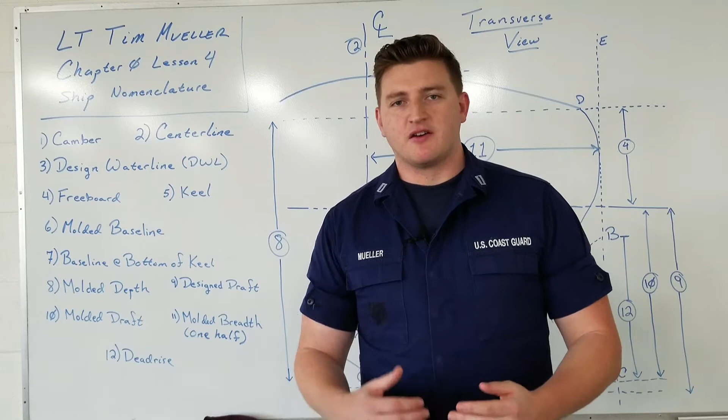When it comes to ship nomenclature, especially when ship stability is concerned, it is crucial that everybody on board, whether it's engineers, operators, or people in combat, completely understand everything that's being talked about when it comes to nomenclature and shifting weights. If the DCA orders weight to be shifted from one place to another, and the person receiving that message doesn't interpret it correctly as the DCA has already calculated, you could have a catastrophic failure in ship stability, and no one knows exactly why.

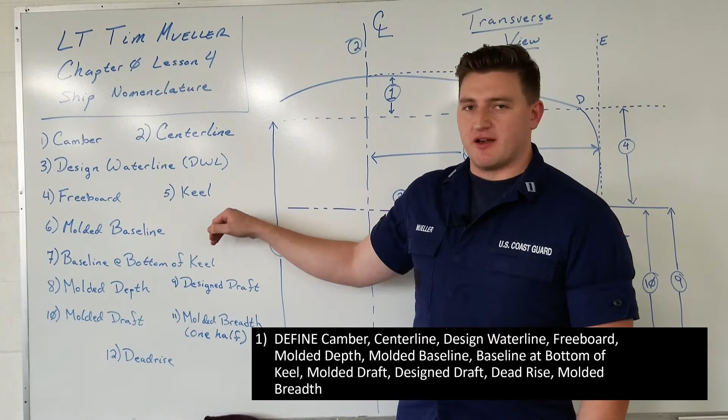So in this lesson, on the left side of the screen, we're going to have all the terms that I'm going to be defining. This will be changing throughout the video as I have a little bit more than 12 terms to go through. On the right side of the screen, we have a diagram on which I'm going to demonstrate these terms. This is the transverse view of the ship.

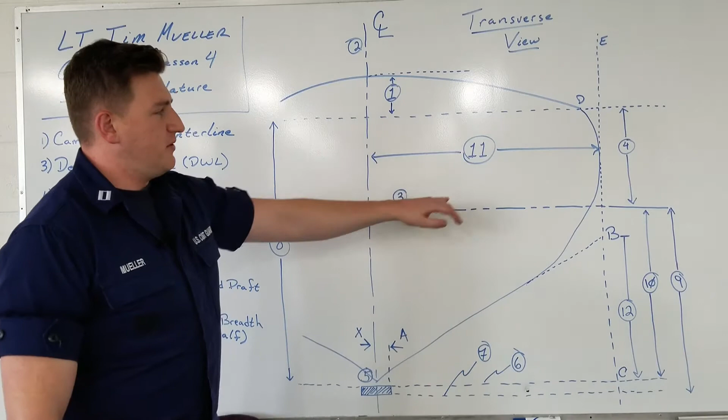So on each side of the center line, we're going to assume that the hull is mirrored. So this is going to be our starboard side. Port side would be perfectly mirrored on the center line. However, we know that there are certain vessels such as flat decks, amphibious ships, aircraft carriers, and the like, who have special operations where they can't necessarily be perfectly mirrored.

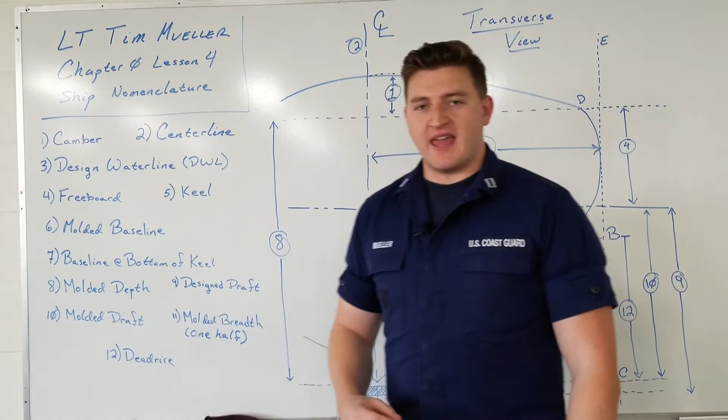So the first term we're going to go over is camber. Camber here is the curvature of the decks. You will always have ships that are higher in the middle on the center line than they are all the way at the very corners. This allows for drainage as well as structural stability that's provided by the decks themselves.

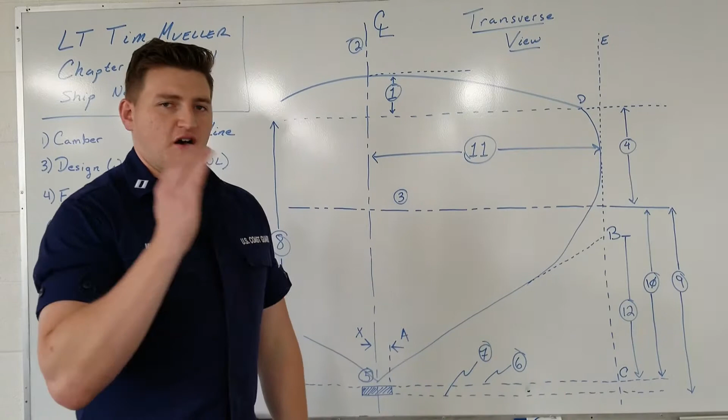Next up is the center line. The center line of the ship runs all the way from stem to stern and just dissects the boat perfectly in half. The symbol that we'll be using from now on is this: it's a C with an L that starts in the middle of that C. And you can see center line runs all the way from the top down to what we'll find as the keel.

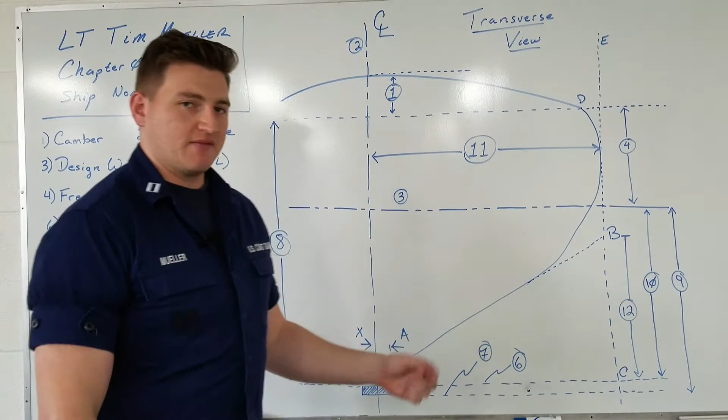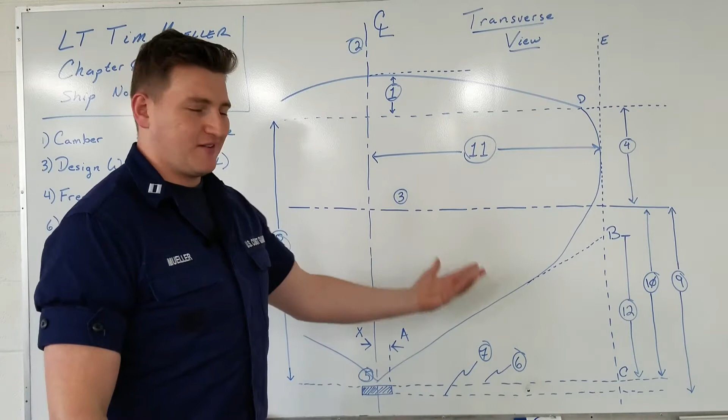Next up, we have design waterline, or as it's also called, designer's waterline. This is the place where the hull is designed to have an initial waterline, as the name suggests. When you develop ships and develop hulls, you have to have one certain condition for the hull in order to do all your calculations around, because every hull has an infinite number of different conditions it can be in, where its center of gravity is, different weights and displacements. So if you just have one that you design off of, you can start making corrections off of what that initial condition is to get as close as possible to your current condition. So number 3 here is the designer's waterline.

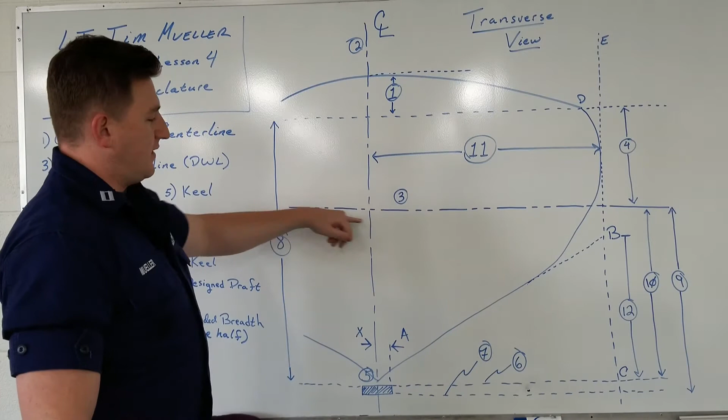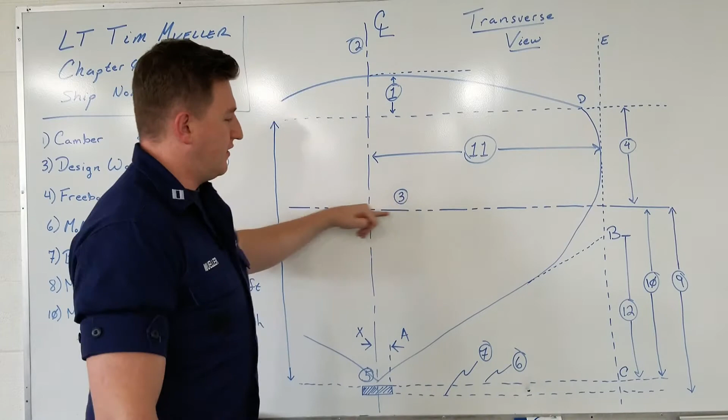However, we know that the waterline isn't going to stay constant there. As the ship gets heavier, the waterline is going to go up. Similarly, as it gets lighter, it's going to go down. So any plane here that's parallel to the design waterline is just called a waterline.

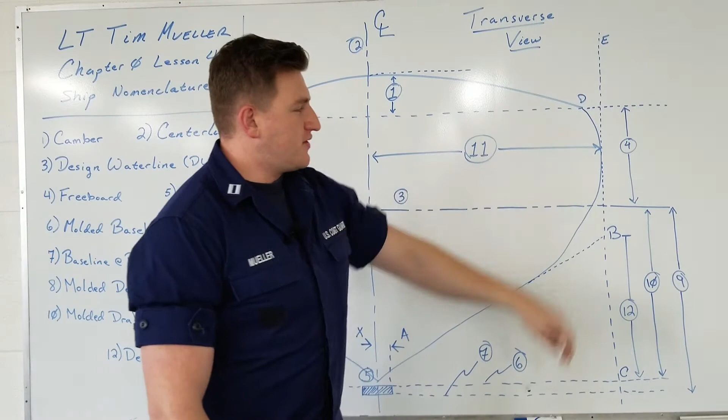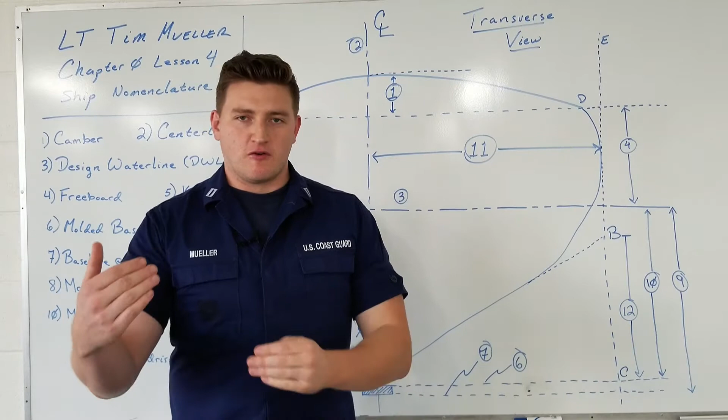Next on the list is freeboard. Freeboard is something that goes hand in hand with what's called reserve buoyancy. Freeboard is located right here, so it goes between the design waterline and then the deck edge. This point D is the edge of the deck, or the deck edge. Freeboard is the amount of hull that's able to sink or actually go into the water because it can roll, and this point can come closer to the waterline. So that's how far the deck can roll or be immersed without water actually coming up onto the deck edge.

All right, now number 5 on the list is something that everyone that served on a ship should be pretty familiar with right now, and that's the keel. The keel is arguably the most critical structural component of a ship. Everything from the girders to struts to the skin of the ship is either directly or indirectly connected to the keel.

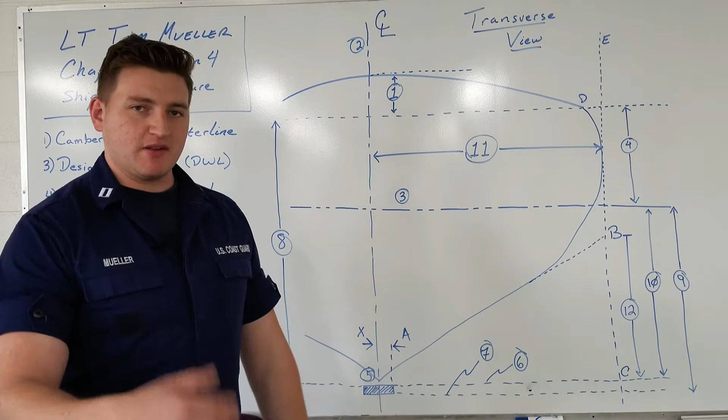The keel forms the basis of the draft, which will be the deepest part of the ship, as well as the overall curvature from stem to stern.

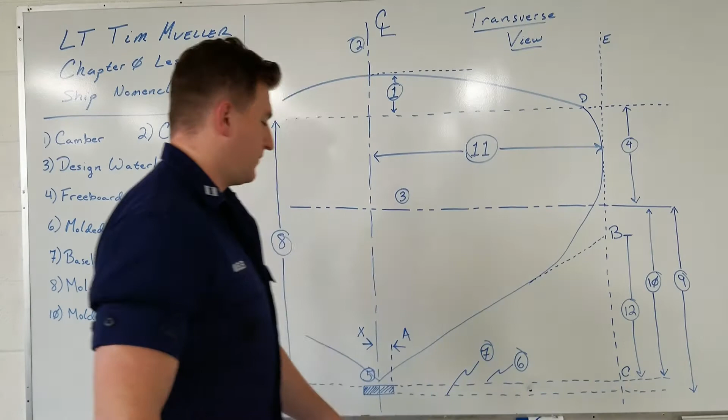The next two terms we're going to go over are the molded baseline and the baseline at the bottom of the keel. The molded baseline is number 6, and number 7 is the baseline at the bottom of the keel. Now the keel on some ships, relatively small ones, might be very small, maybe only a foot, maybe 2 feet. So the distance between the molded baseline and the baseline at the bottom of the keel might not be very significant.

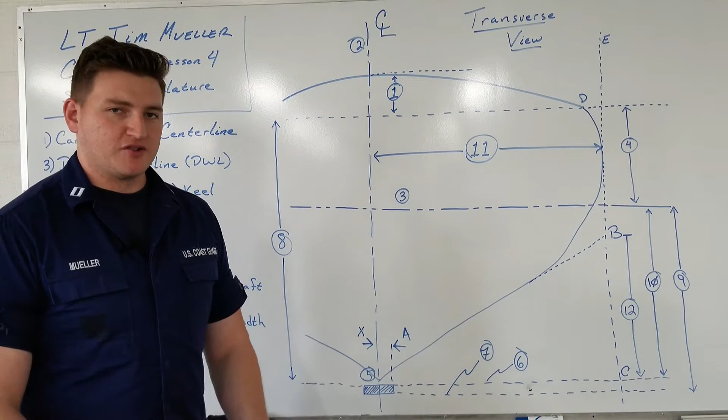However, when you get into larger naval ships, such as the LHDs or aircraft carriers, this keel can be enormous. And so the distance between the molded baseline and the baseline at the bottom of the keel can be significant. So moving on from that, we have molded depth.

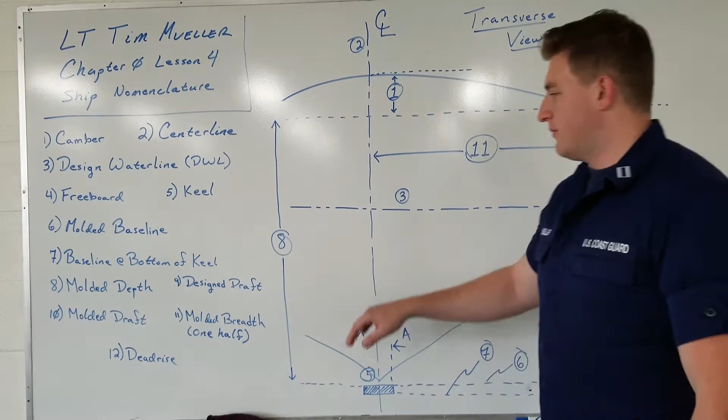Molded depth is number 8, right here. This dotted line goes from point D, which is where the deck edge comes, and the molded depth goes all the way to the molded baseline. Now here's a different reference point, so we're not using the baseline at the bottom of the keel, we're using the molded baseline, and we're going all the way up to where the deck edge is.

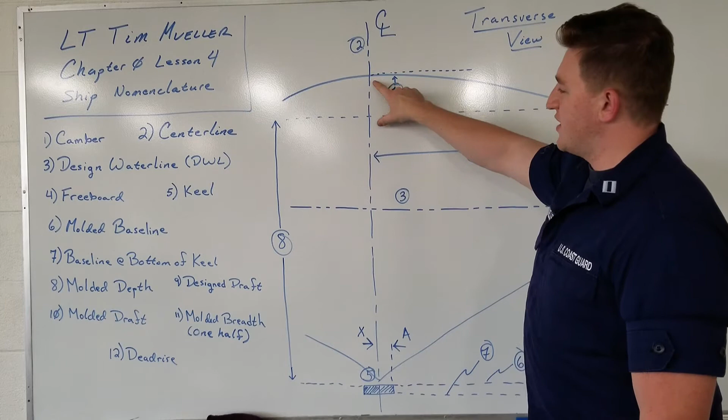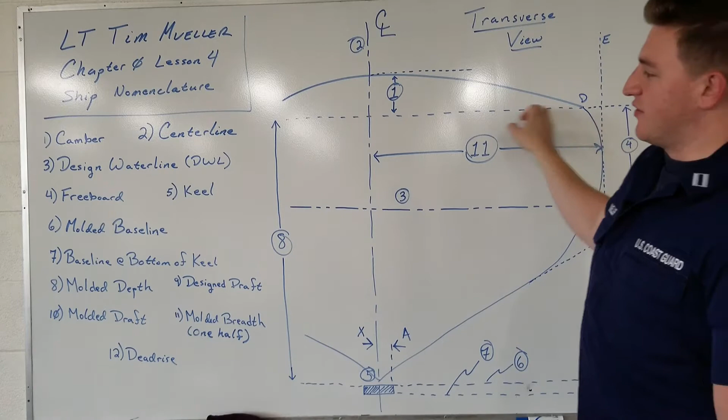So you can take this as the height of the ship at the center line minus the camber, which is number 1, and that's going to be that top point. Or by definition, camber is 0 at the deck edge. So you just take that deck edge point all the way to the molded baseline, which is on top of the keel, and that's going to be your molded depth.

Next up, we have design draft. If you've ever stood next to a Navy ship or a Coast Guard vessel or a cargo ship on a pier, you probably noticed right at the waterline there are several different numbers. Those numbers tell you exactly how much ship there is underneath the waterline.

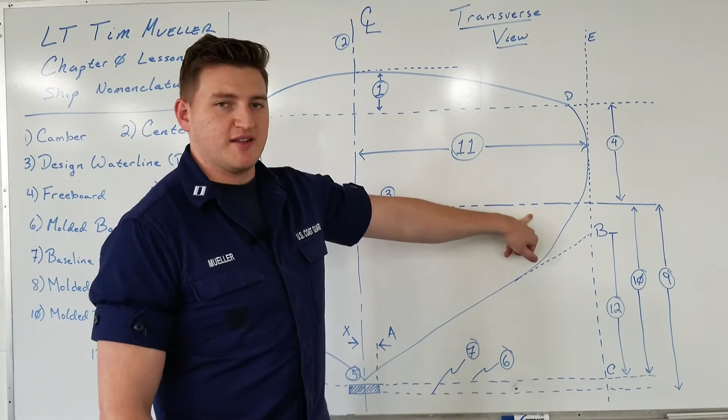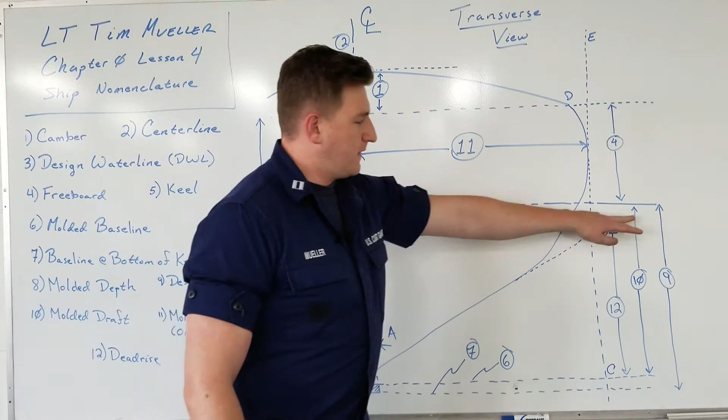When we talk about design draft, as we are right here, we're talking about the distance from the design waterline, or the designer's waterline, all the way to the baseline at the bottom of the keel. So that's going to be our number 9, design draft. It goes from the design waterline all the way to the bottom of the keel, and this tells us exactly how much ship we have underneath the water.

That allows us to make calculations and do chart corrections and navigation, voyage planning, things like that, so that we don't hit anything when we're sailing and steaming along.

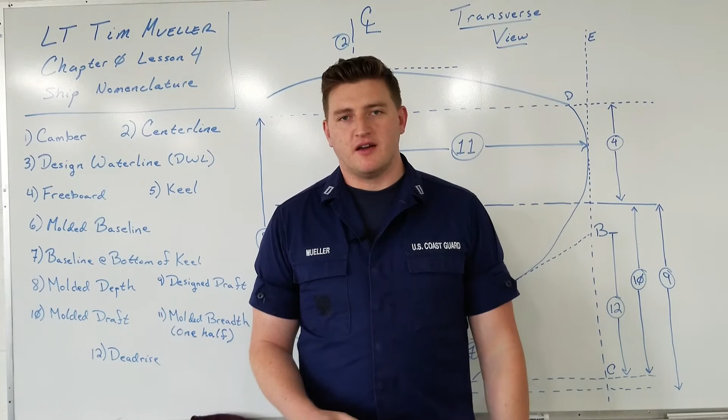Now, there are several different types of draft. You have standard draft, design draft, navigational draft, as well as different drafts located on a Plimsoll mark, which is something we'll introduce in a later series. However, we're going to go over molded draft right now.

Molded draft is number 10, and it's going to start at the same place as design draft, so it starts at the design waterline. However, it's not going to include the height of the keel. So 10, our molded draft, goes from the design waterline all the way down to the molded baseline. Next up, we have molded breadth.

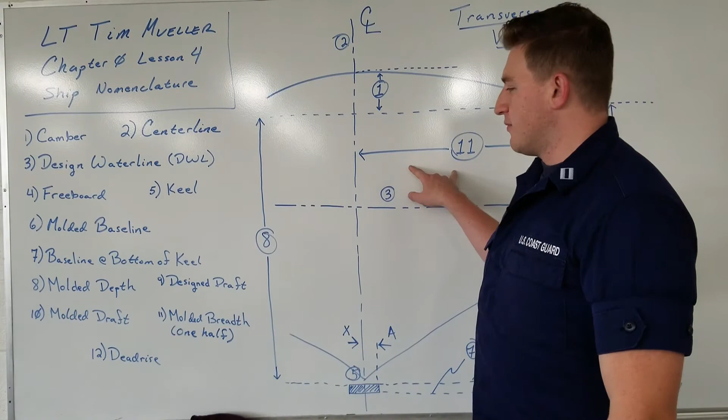A lot of people will call this the beam of the ship, but it's essentially just the extreme width of the ship. This is important when you're going through a canal or any place where you might have a restricted passage. So 11 here is half of the molded breadth. We start at the center line, and if we assume everything is mirrored on the port side, then our entire molded breadth is going to be this distance times 2.

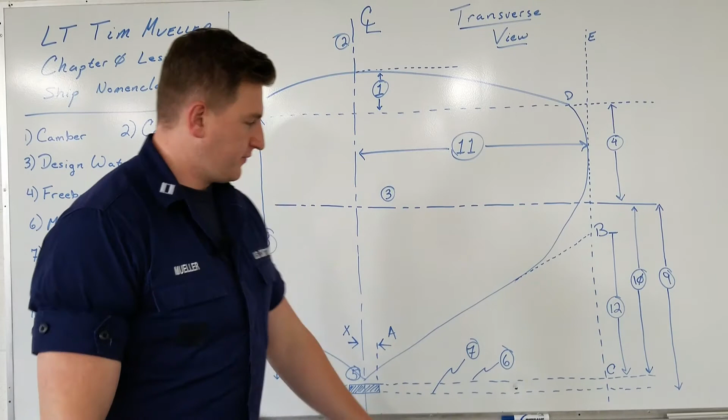The last term on this diagram is called dead rise, or rise of the floor. Now you see here, if you start at the keel, most hulls are going to be very linear up to some point. If you continue that line all the way out, and draw a point, here's B, where it intersects with half the molded breadth of the ship, that's what's called your dead rise.

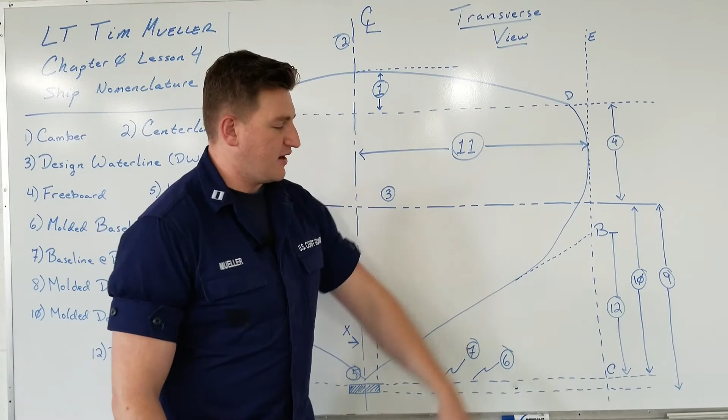Number 12 here goes from B to C. This basically tells you if you don't have a lot of dead rise, then you have a very blocky ship. You're going to have a higher block coefficient than something that has a higher dead rise. Block coefficient is something we're going to get to later in the video. However, just remember, more dead rise, so more distance from B to C, means you're going to have more of a V shape in that hull.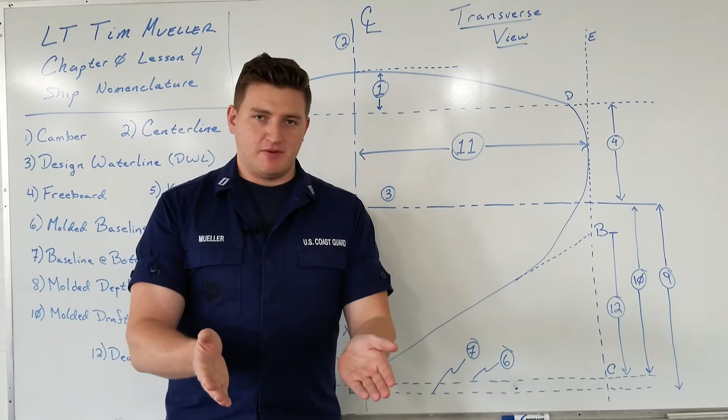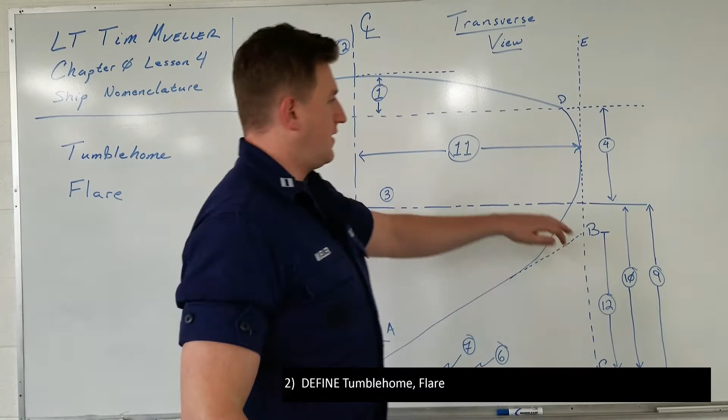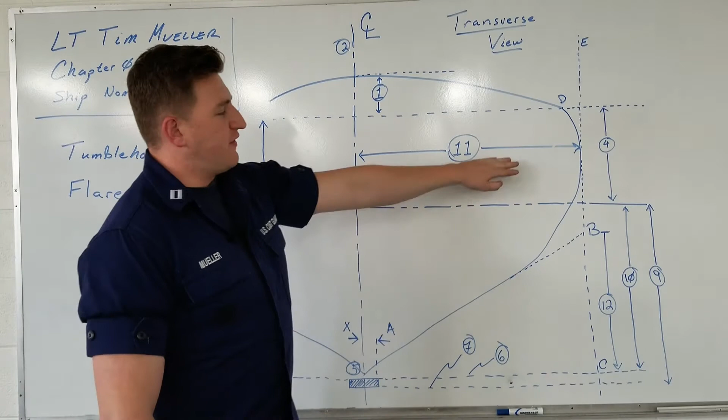These next two terms, tumble home and flare, have to do with the curvature of the sides of the hull before it reaches the deck edge. Tumble home is defined as this point D to this line E. Tumble home is how much the hull sides kind of cave in at the top as they rise up to the deck edge from the extreme width of the ship. Some vessels have a strong tumble home, which means it comes in very strongly from the extreme width, and some ships don't have any tumble home at all.

The next term is flare, and flare is seen pretty much on every ship. There are a few exceptions. However, the common design of Navy warships and Coast Guard ships have a flare, and flare is the outward curvature of the hull, especially seen towards the bow.

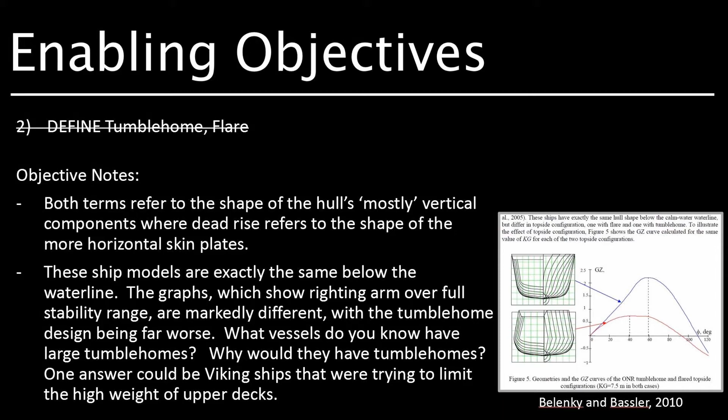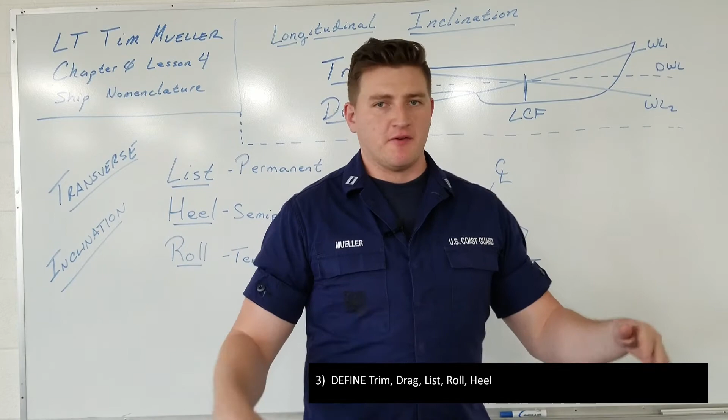All right, next up, we're going to get into the very basic terms of inclination. We're going to start off with longitudinal inclination. This is where we're looking at the side of the ship. So this diagram here, with the stern here and the bow to the right, we have two terms: trim and drag.

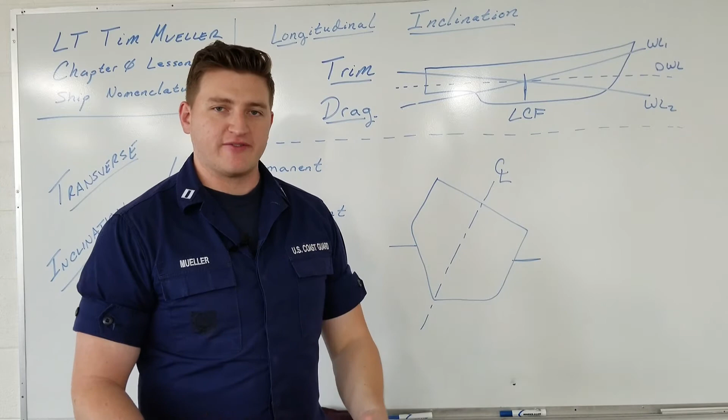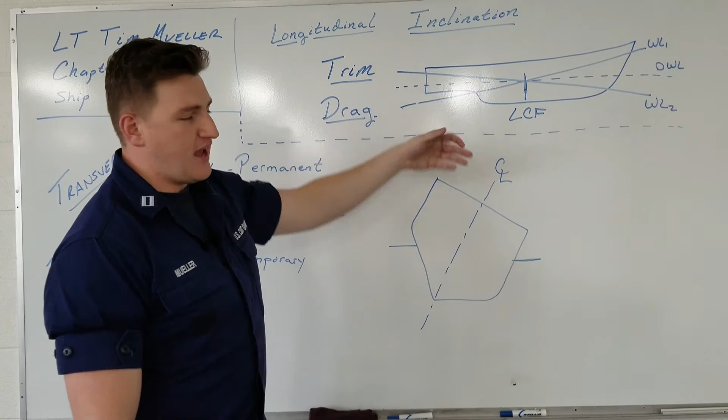Trim is something that's an instantaneous change in the drafts, and drag is something that's designed. Now, when I say change in drafts, remember when I talked about design draft and molded draft and all that? Well, the ship is going to have different drafts forward and aft. We refer to the forward draft as the forward draft and the aft draft as the aft draft. That's going to tell us how much ship is below that exact point on the aft and the forward side. You might also have some in the middle, which can give you your mean draft, and that's just an average between the two.

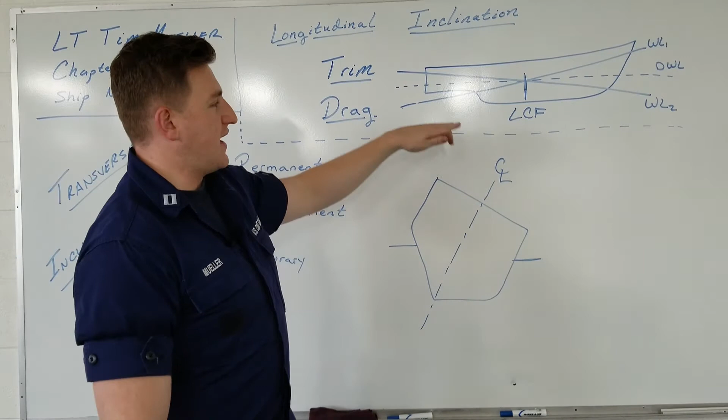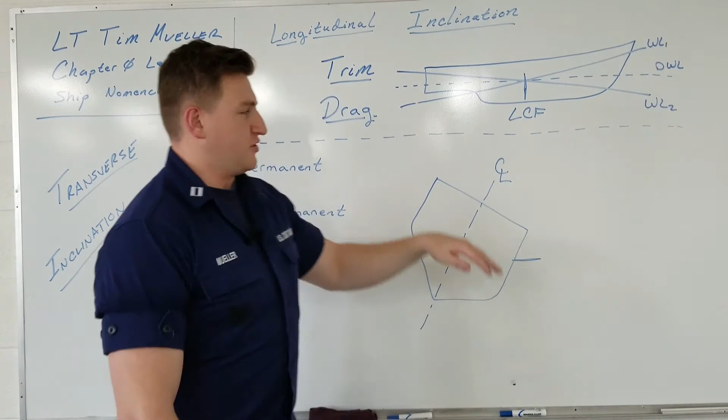So with trim, you'll have 1 foot of trim by the bow, which means that the bow is 1 foot deeper than the stern is, how it's designed to be. Or you could have, say, 2 feet of trim by the stern, which means that your stern would be sunk down 2 feet deeper than the bow.

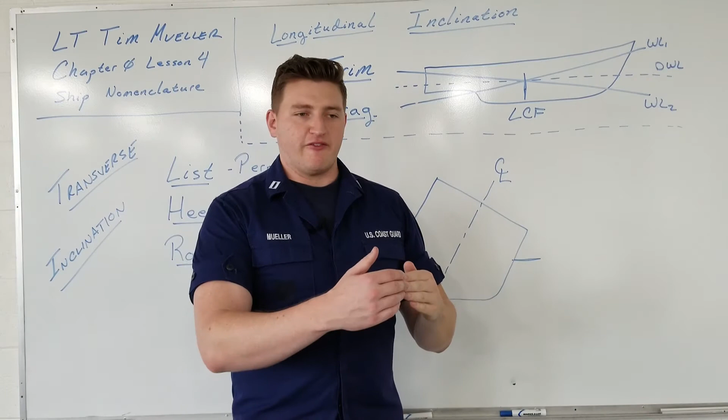A lot of ships are designed to have 0 drag, and drag is a designed trim. This can make your propulsion plant more effective, or it might help the hydrodynamics of your hull. So if you have a ship with 0 drag, and your trim gives you, let's say, a foot of trim by the bow, your bow is going to be deeper. So if you say trim by the head or the stern, that means that the head or the stern is going to be deeper than the other end of the boat.

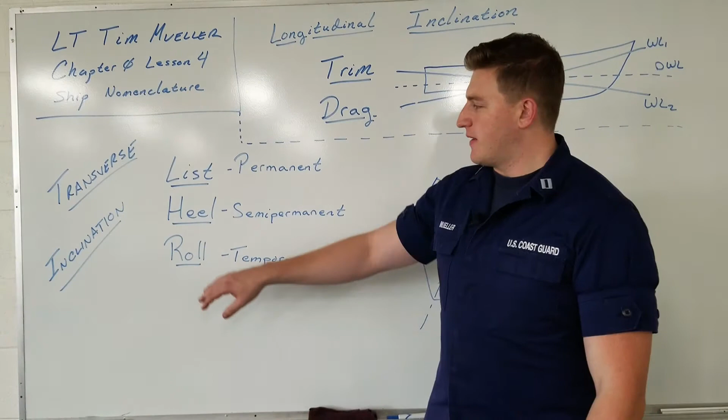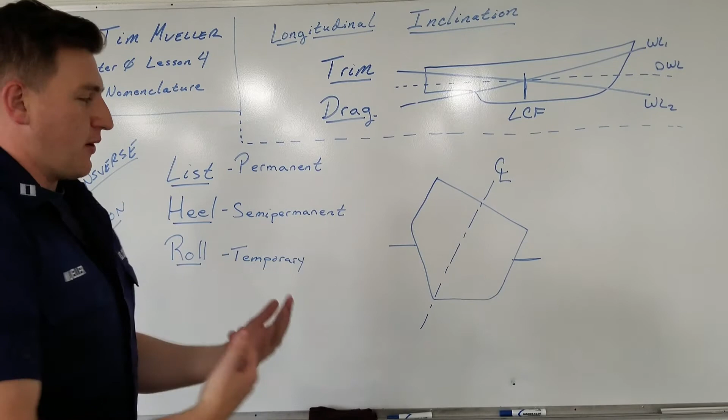All right, lastly on the board, if you look to the left, we have these 3 terms. Where previously we talked about longitudinal inclination, we're going to talk about transverse inclination. We've already covered that a little bit in the first 3 lessons. Here we have the typical diagram that I've shown you before of a ship that's inclined over to some angle. Well, if you look at this ship and you don't know anything about it except you just have this hull that's over to the side, you don't know what's causing this inclination over to the side.

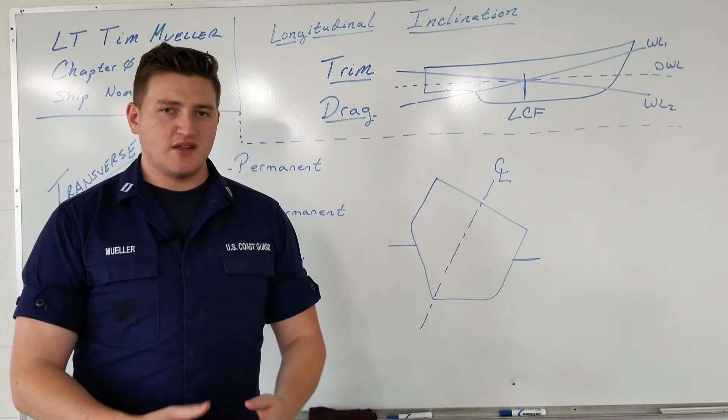It could just be the motion of the waves that are hitting the hull constantly every couple of seconds. That could be causing it, which means there's no need to worry. It happens all the time. The ship is just going to pop right back up. It could be caused by a heeling moment, so that's something like a strong wind off to the beam, or if you throw the rudder over really hard.

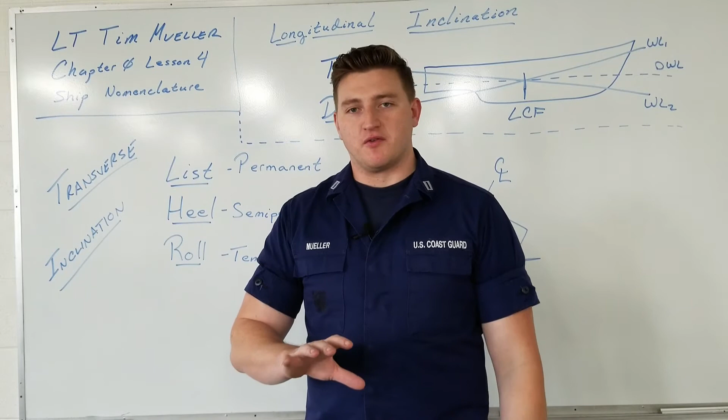If you've been in a high-speed turn situation, you know that the ship is going to roll to one side and then eventually to the other side. Or it could be caused by a list, which means there's an off-center weight that you've put, or you could have a negative metacentric height.

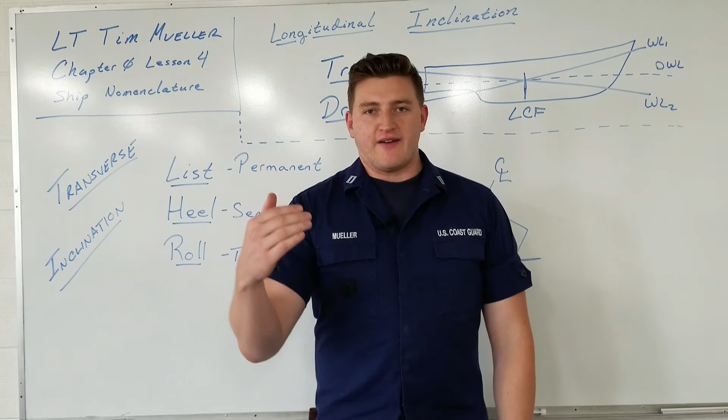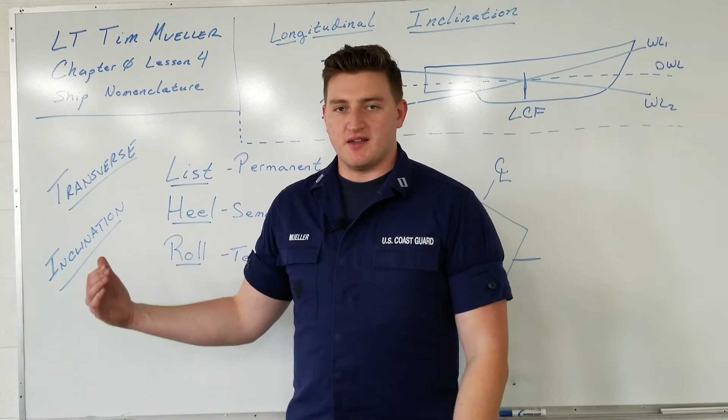So just by looking at this diagram, you don't know anything about what's causing the ship to be inclined. You could be in just a regular, everyday situation, like a roll. You could be in a more serious situation, like a heel. Or you could be in something that you've done or calculated that you're comfortable with, which would be a list.

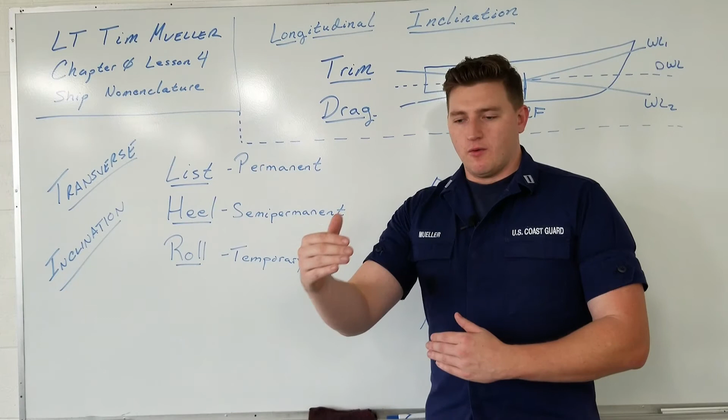Like I said, list is something that's permanent. And when I say permanent, it has to do with the weight distribution on board, or the location of the center of gravity with regards to the metacenter. And we'll get into that later, but that is the metacentric height. It's a very important figure for commanding officers to know instantaneously how the stability of their ship is doing.

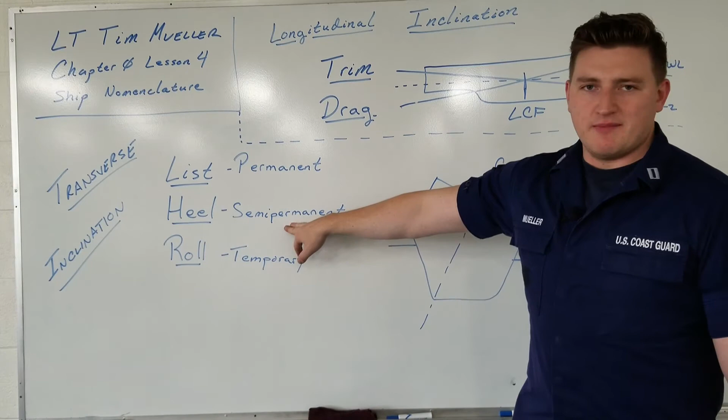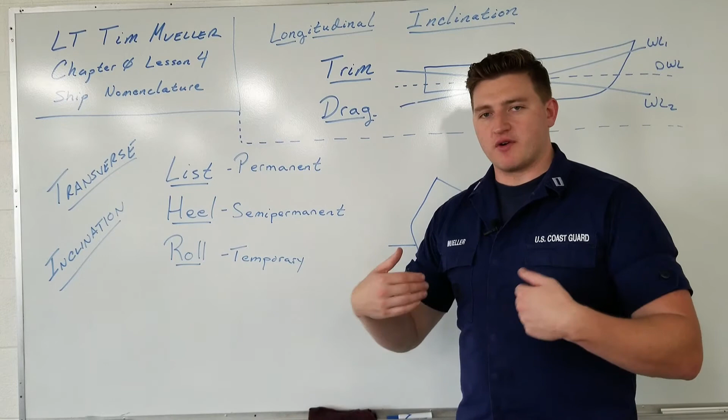So list is something permanent, caused internally. Heel, we call semi-permanent. If I have a heel caused by throwing the rudder over at a high speed, as long as I have that rudder over, the ship is going to be inclined. However, if I take that force away, if I take the torque away, then the ship is just going to right itself to where it was before the heeling motion started. So a heel is semi-permanent. As long as that force stays with you, then you're going to be inclined to such and such an angle.

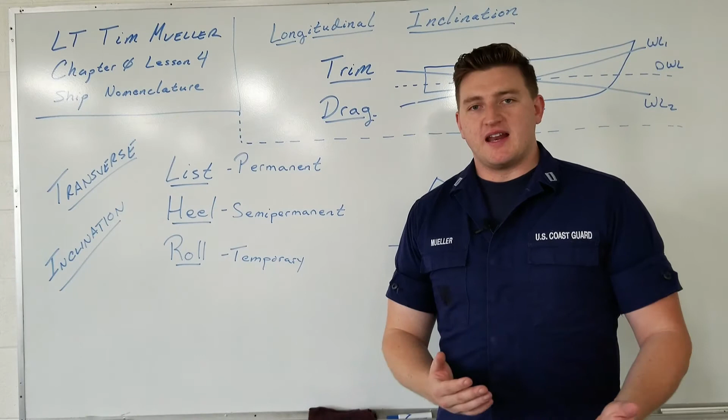And a roll is something temporary. It's just caused by the undulating of the waves hitting the hull and making you go from port to starboard and to port again, that everyone has seen if they've served on any ship.

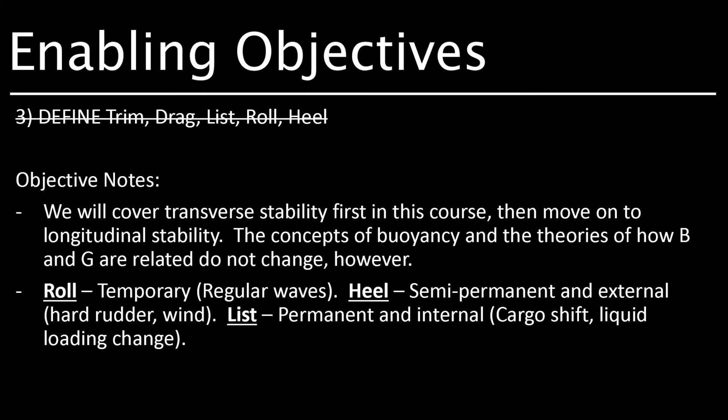All right, so now before moving on, I want to talk about displacement and tonnage. If you serve on a ship, you probably have a general interest in ships. And so you might read articles on gCaptain or Wikipedia or something like that, and you might see these two terms, displacement and tonnage, thrown around a little bit. There's a very distinct difference between displacement and tonnage, which I'm going to go over quickly right now.

Displacement always refers to a weight, and that's always in long tons. We'll see light ship displacement, which we'll use a lot when we're talking about center of gravity. There will be full load, there's a standard displacement, as well as an instantaneous displacement. We'll typically be using light ship displacement, full load displacement, and instantaneous displacement, which should be between the two.

Tonnage, on the other hand, is typically a measure of volume. There is a deadweight tonnage, which tells you how much weight a cargo ship can hold until it sinks its limiting draft marks, meaning that's the maximum amount of load that a cargo ship can take on. However, when you talk about gross tonnage, net tonnage, gross register tonnage, and net register tonnage, those are always going to be a measure of volume.

Now, net register tonnage and gross register tonnage are terms that aren't used too much anymore. They were antiquated in 1994. However, gross tonnage and net tonnage are terms that are used right now, and they're typically used for tax purposes, trying to figure out how much a ship or a company should pay when they try and go through the Panama Canal, or a scenario like that.

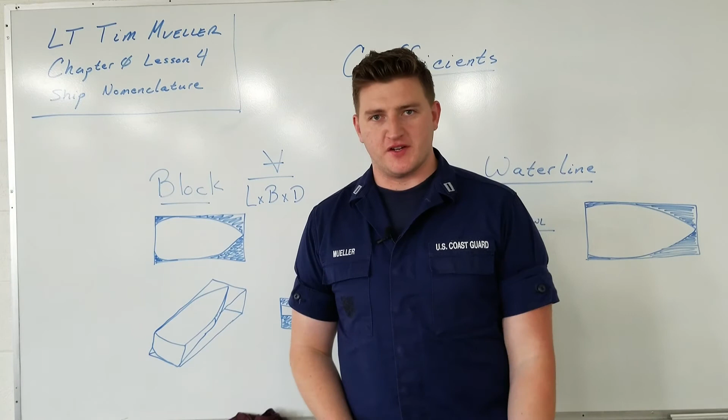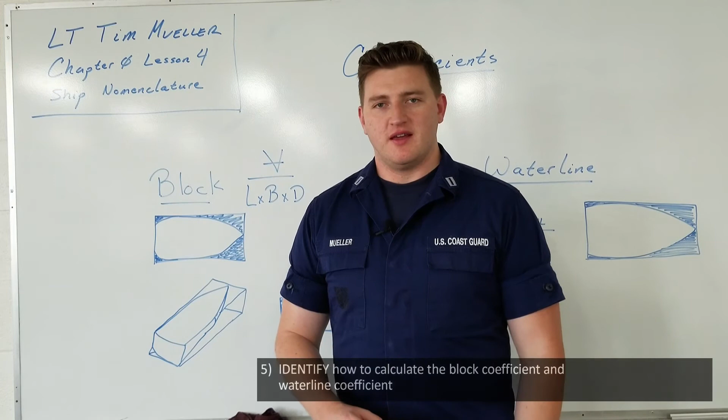All right, now we finally come to the last part of this diagram, which is going to go over some coefficients. There are tons of coefficients that can be used in naval architecture, each one telling a naval architect something different that he can't get from any other coefficients. While we're not going to get too complex in this lesson or this entire course, I do want to introduce these two because they will pop up later when we talk about statical curves of stability and how we derive them and where all these numbers come from.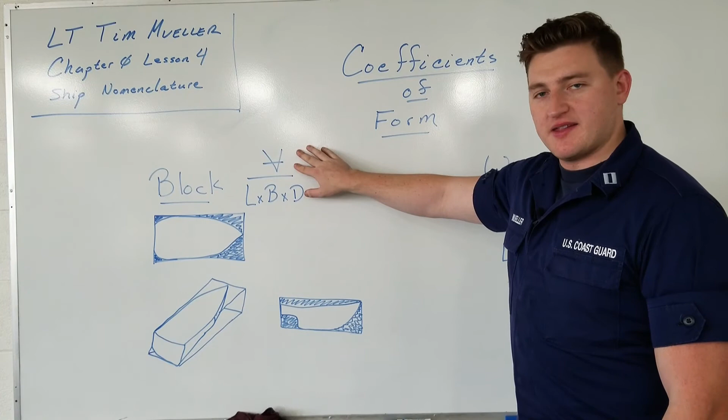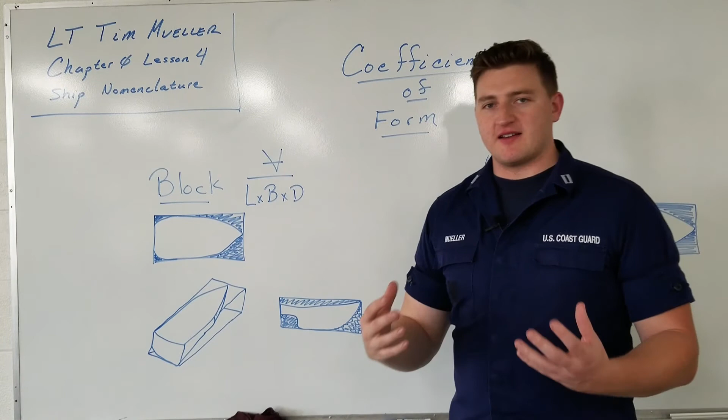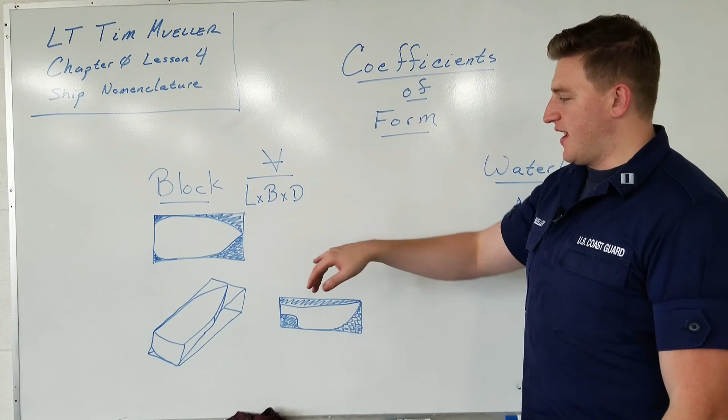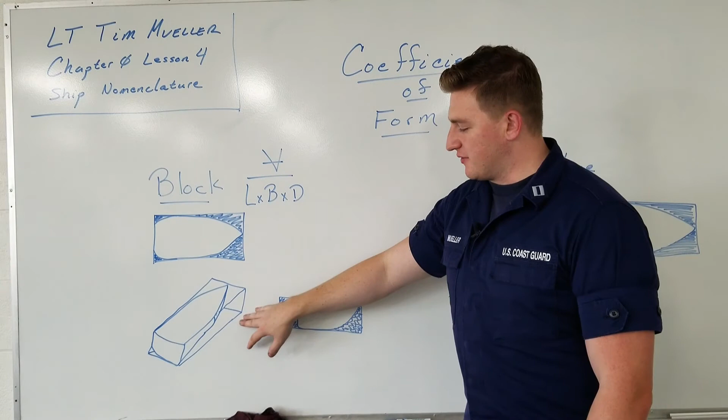So here is the block coefficient. This is capital V with a horizontal bar through it, like I did in the last lesson, which is the total submerged volume of the vessel divided by the length, breadth, and depth of a rectangle that encompasses the entire submerged volume. If you take the submerged volume and picture it as a separate shape, make a rectangle that has the most extreme width, length, and depth in that submerged volume, that gives you the denominator: length, breadth, and depth. Now you see how much of this rectangle is taken up by my ship's hull.

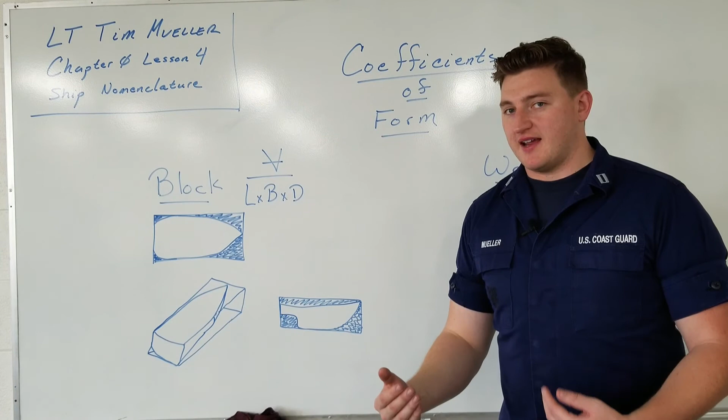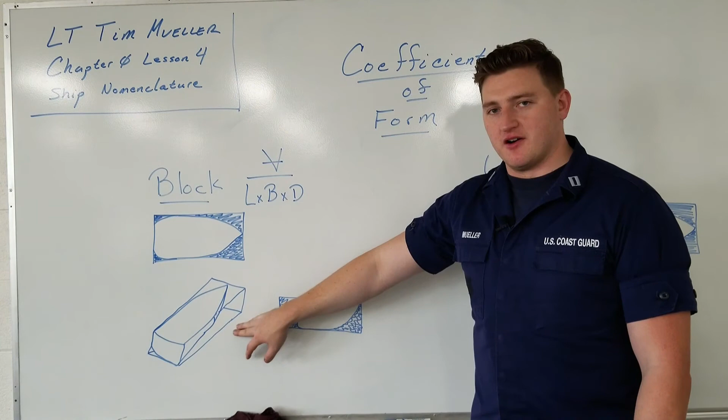The block coefficient gets its name because you want to see how blocky the hull is. This number will always be either 1 or less than 1. If you have something close to 1, say a barge that's almost completely rectangular, it's going to take up most of this block. However, if you have a block coefficient around 0.6, then you have a much faster hull, something not meant to hold a lot of weight, but meant to go through the water quickly.

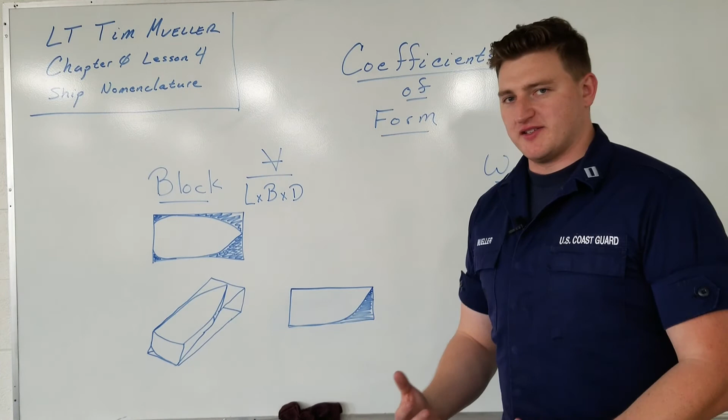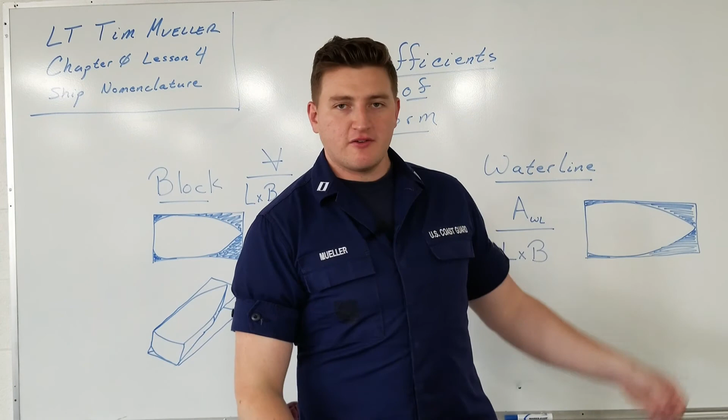Now let's look at two different views of this block coefficient. Block coefficient is just a number, less than 1. If we look at the physical meaning, here's a side view, which doesn't tell us much from a naval architecture standpoint for what we need in this course. However, when we go top down, we get what's called the waterline coefficient, shown on the right side. This is extremely important to naval architects and to us trying to understand ship stability. Ship stability and the determination of the metacenter and metacentric height come directly from the area of the waterline plane.

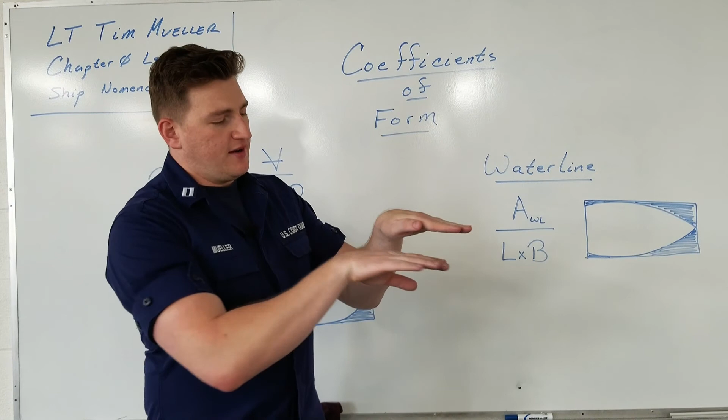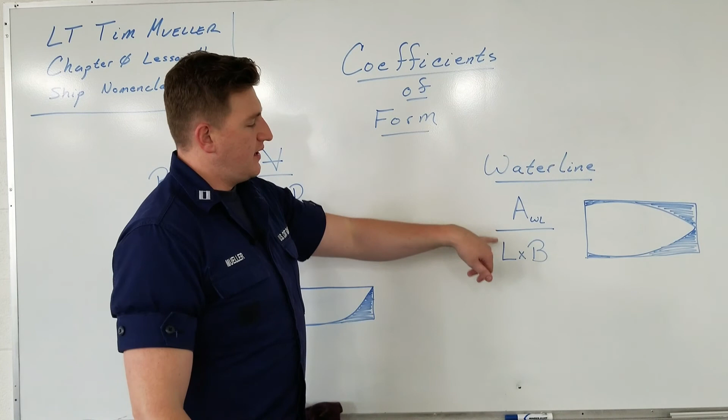So what is this waterline coefficient? A waterline is just the area of the waterline plane. If you imagine a hull, an entire boat, and cut a slice of it, a cross section where the waterline meets the hull, and count that as a regular shape, it's going to have an arrowhead kind of shape, as you can imagine. Then you divide that entire area by the length and breadth of a rectangle that, just like with the block coefficient, takes up the entirety of the length and the entirety of the breadth. We're talking about just that cross section, not the entire submerged volume.

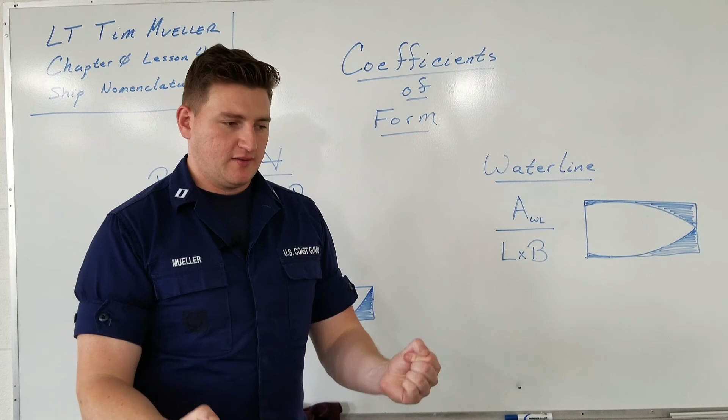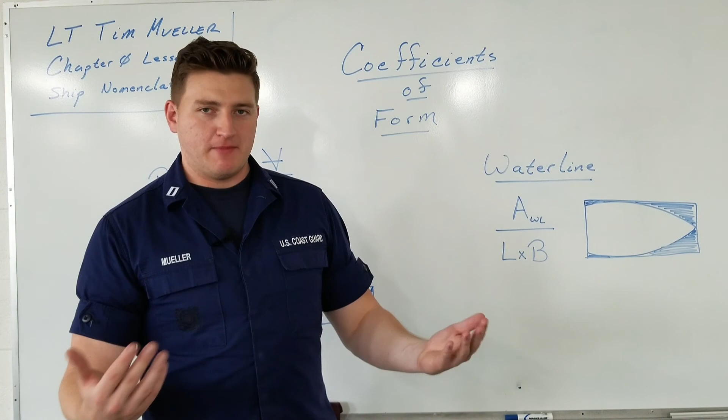So this can have values from 0.45 to 0.8, depending on how rectangular, how blocky that waterline area is.

The next lesson, which will be lesson 5 in chapter 0, is just going to be a quick summary of what we've gone through here in lessons 1 to 4, as well as some practice problems that will really help show these concepts when it comes to center of gravity, center of buoyancy, and everything else. Hopefully it will tie it all together, and you'll come back and watch that lesson.